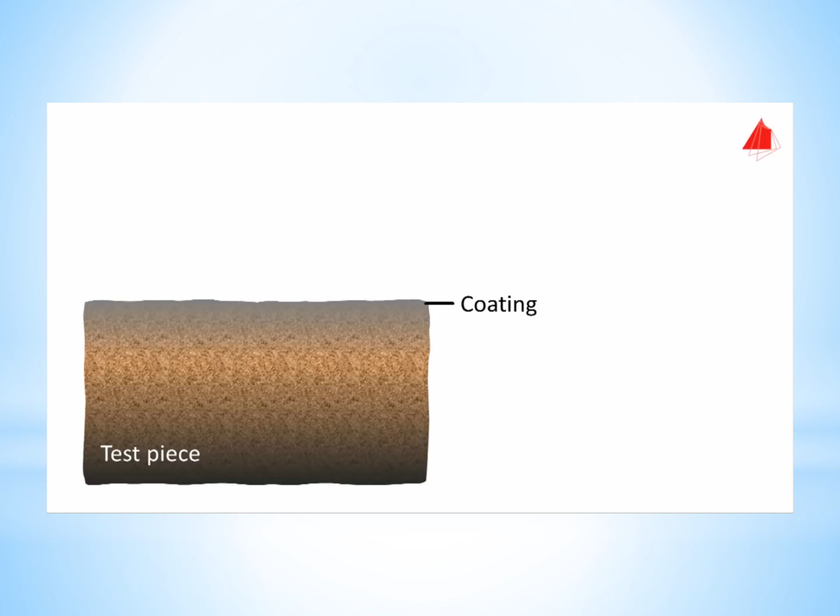Dye penetrant examination is an important method of non-destructive testing of materials. This is the basic principle. Often the surface of a workpiece is covered with rust or paint, which masks material defects, as shown in the sectional view. Therefore, the first step is always the pre-cleaning of the test piece surface.

This must be done very thoroughly so that any defects present, here it is a crack, are open to the surface. In the second step, the penetrant is applied to the test piece, usually a red-colored low-viscosity oil. Due to the penetrant's high surface wetting capability, it penetrates into the defects and cracks.

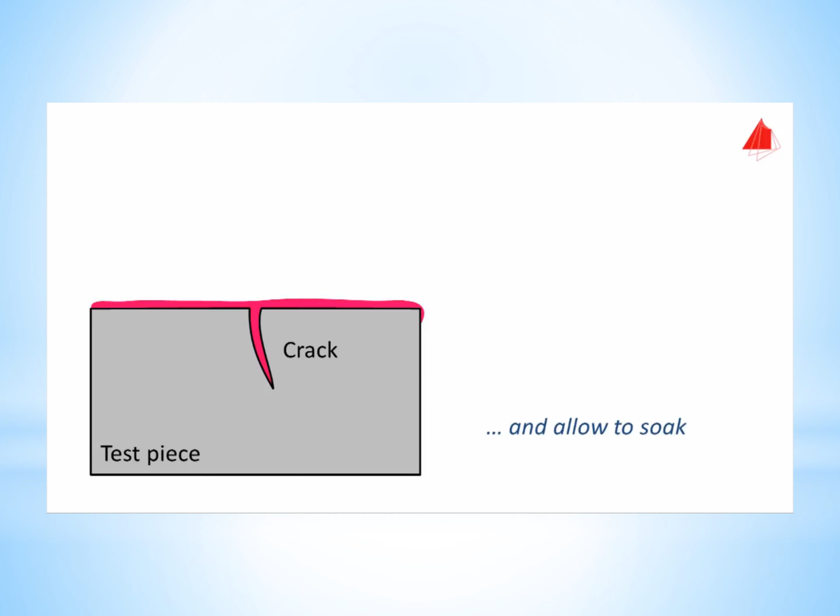After several minutes of dwell time, the third step is to rinse the part's surface cautiously with water. The water removes the penetrant completely from the surface, but leaves it in the crack.

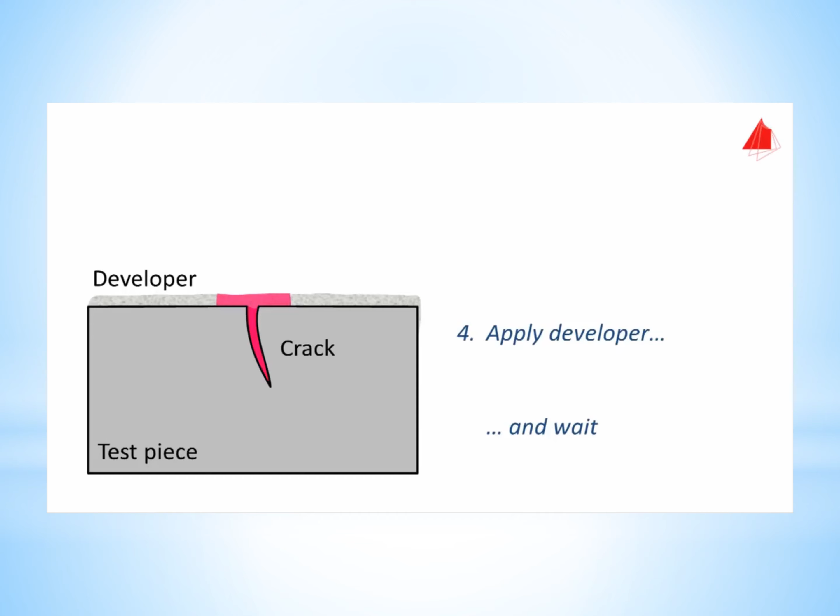Now, the fourth step. After drying the test piece, a developer is applied onto the surface. The developer is a fine-grained white powder suspended in a liquid. It forms an even coating on the surface. After drying, it draws penetrant from the crack out onto the surface. The location of the crack is indicated clearly on the surface.

And this is how it is carried out in practice. We wish to inspect two samples: a segment of a worm gear shaft and a broken bicycle crank arm. Both test pieces have already been cleaned. First in line is the worm gear shaft.

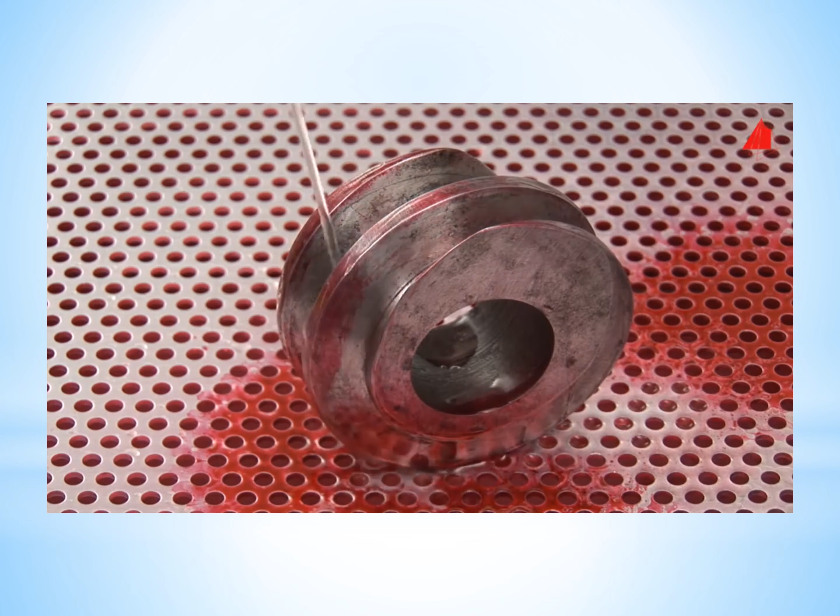The material tester applies the penetrant. After a dwell time of about 10 minutes, she removes the excess penetrant from the surface by rinsing the test piece gently with water. She takes care not to rinse for an unnecessarily long time because the penetrant is supposed to stay in the defects.

Now she dries the surface of the sample with a cloth to absorb the excess water. As the final step, she applies the developer and lets it dry. That's it. Several cracks are indicated on the surface in deep red color.

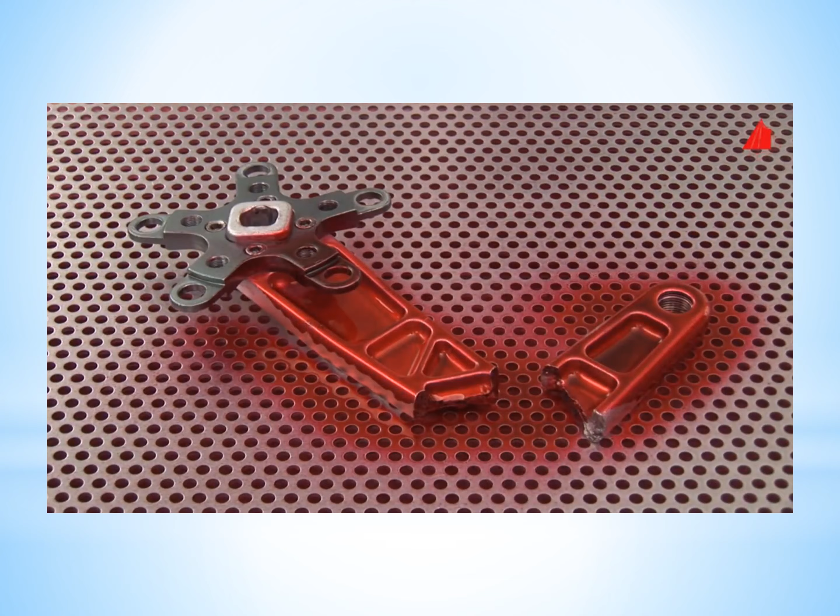Next, the broken bicycle crank arm has to undergo the dye penetration test: spraying with penetrant, allowing to soak, rinsing, drying, and applying developer. Clearly, additional cracks are indicated on the fragments.

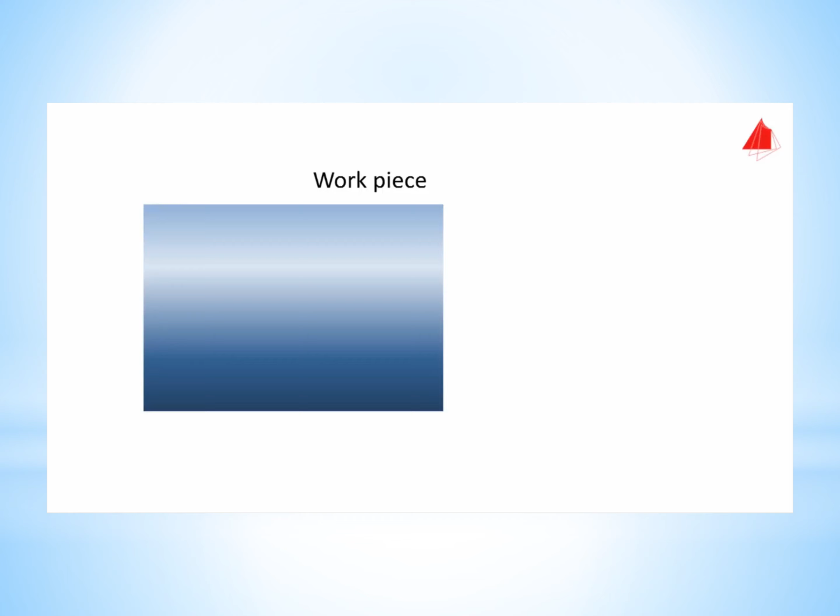Non-destructive testing: ultrasonic examination. The basic principle of ultrasonic testing of materials is the propagation and reflection of sound waves. As an example, a cylindrical workpiece is shown in the animation. The longitudinal section through the cylinder shows the position of the atoms, extremely magnified and simplified as a single crystal.

To begin with, a rigid, unyielding stop is attached to the right front end of the cylinder. At the left front end, a disc is installed. It will be used to transmit and receive sound waves. Pushing and pulling briefly at the disc causes a longitudinal sound wave to propagate through the cylinder.

When the sound wave reaches the rigid stop at the right side, it is reflected and runs back towards the disc, which now serves as a receiver. A free end is also able to reflect a wave.

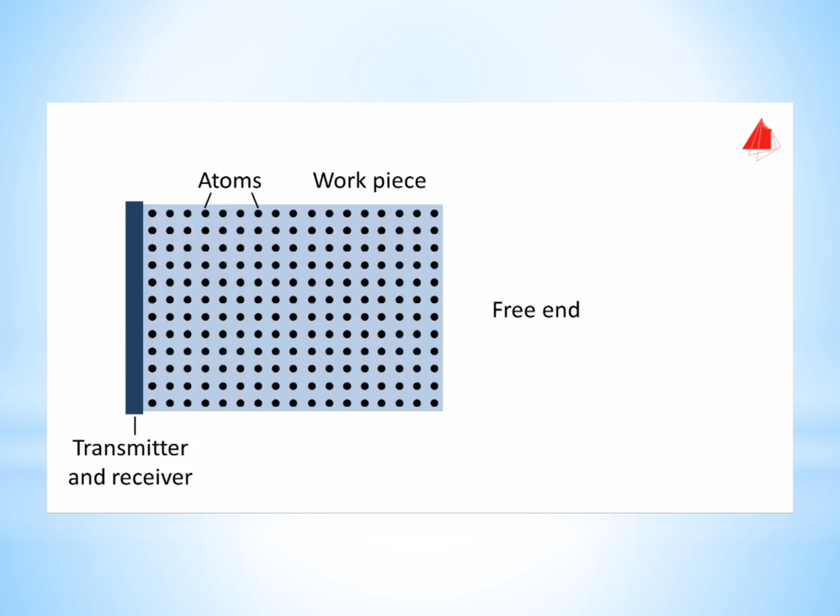In this case, however, the tensile side runs ahead in the reflected wave and finally deflects the receiver to the right. The reflected wave is even reflected again and actually travels several times across the length of the cylinder, but this is not shown in the animation for the sake of simplicity. So, if a sound wave is generated at one end of a workpiece, it will travel through the material at its speed of sound.

At the free end of the workpiece, the sound wave is reflected and returns to the transmitter, which then acts as a receiver. For ultrasonic testing of a workpiece, a rather compact transmitter is used in most cases, generating a short ultrasonic pulse. At a place free from defects, the pulse travels to the right front end, also termed back wall, where it is reflected and recorded again as an echo.

When the transmitter is moved a little downwards, the cavity reflects a part of the wave. That part arrives earlier at the transmitter than the rest of the sound wave. Even further downwards, the cavity reflects the complete ultrasonic pulse.

For material testing, either the echo of a defect can be utilized, this is the pulse echo mode, or the phenomenon that hardly any sound waves pass through the imperfection, this is called the through transmission mode.

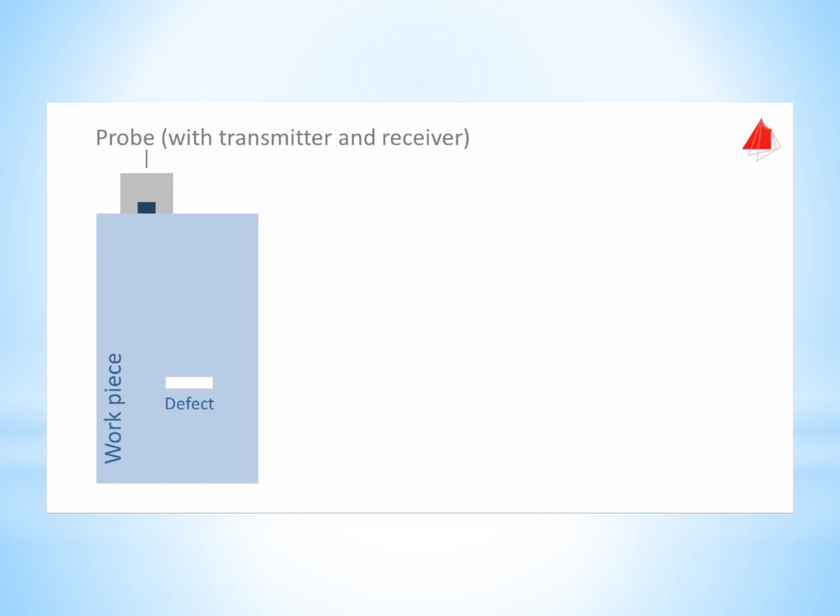In pulse echo mode, a transducer installed in a probe performs both the sending and the receiving of the ultrasonic pulse. On a computer monitor, intensity is plotted upwards on the y-axis and time towards the right on the x-axis. With the probe at a place free from defects, only two signals may be seen on the monitor: the transmission pulse and the echo from the lower surface of the workpiece, termed back wall echo.

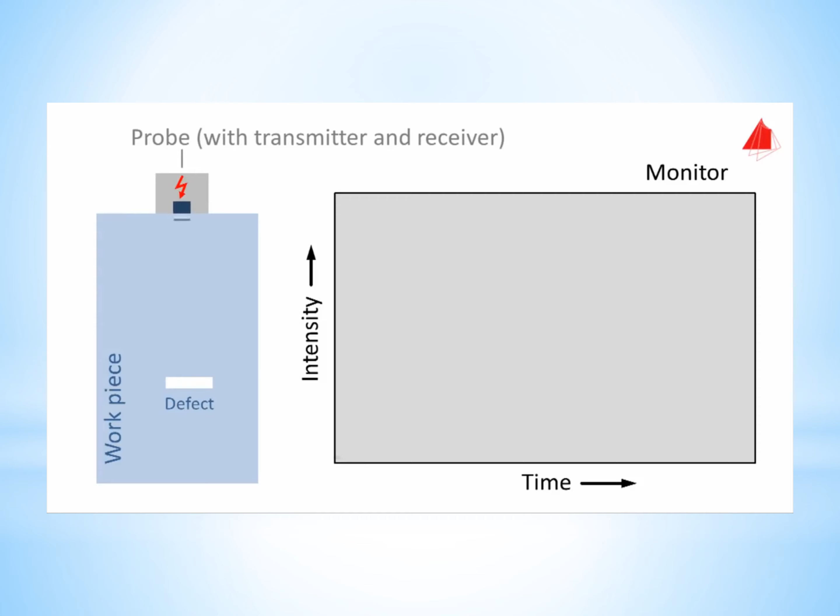Moving the probe towards the right leads to an additional echo created by the defect. Even further towards the right, only the defect echo is visible apart from the transmission pulse.

In our laboratory, there's a green painted steel cylinder to be found. It contains artificial defects which are invisible from the outside. To track down the defects, the material tester uses the pulse echo method.

After placing the probe on top of the cylinder, initially no echo at all may be seen on the monitor. The reason is the too small contact area between the probe and the workpiece. Only with the use of a gel, the so-called couplant, can the ultrasonic pulses get into the workpiece and back into the probe.

Now the back wall echo turns up on the monitor. The material tester spreads the gel evenly on the top surface, so she is able to examine the entire cylinder.

Using the velocity of sound in the material, one can plot the calculated depth on the monitor to the right instead of time. A very useful feature.

With the help of so-called trigger gates, which may be set on the echoes with a computer mouse, the depth of the defects can easily be read off at the lower left-hand corner of the monitor. The cylinder back wall lies at a depth of about 200 mm below the probe, so the cylinder has a height of 200 mm. And here we go.

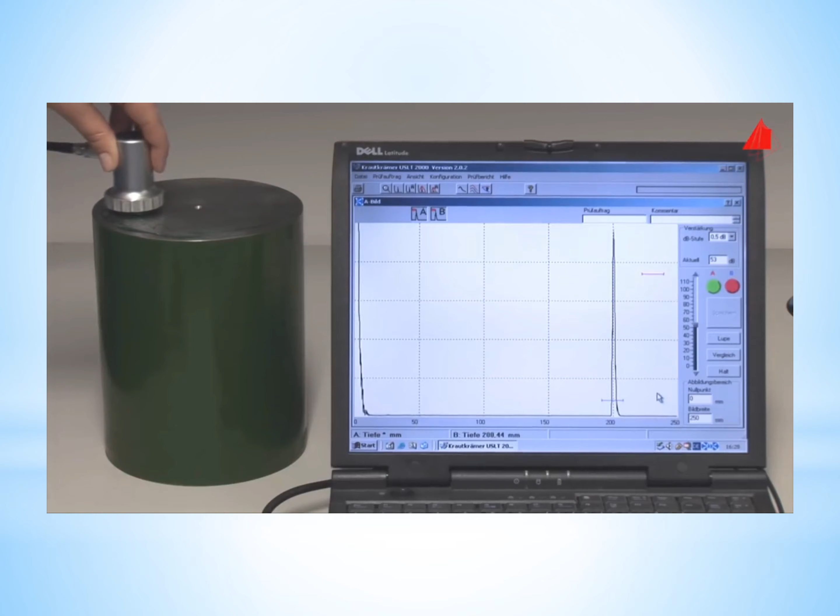The material tester scans the upper front end of the cylinder with the probe and observes the monitor. A defect echo appears on the monitor. This defect is located at a depth of 130 mm below the surface.

Another echo indicates a defect at a depth of 87 mm. The second smaller echo at 174 mm is caused by double reflection on the same imperfection.

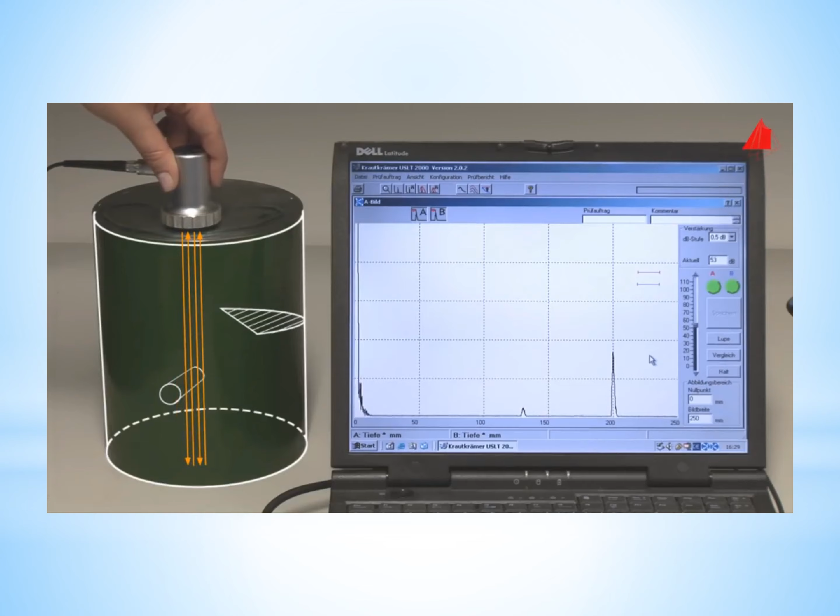And these are the defects: a drill hole and a saw cut. Filled up near the surface and painted, they are not visible from the outside. The drill hole is at a depth of 130 mm, and the saw cut 87 mm below the surface.

Trams are popular means of transport in Karlsruhe in southern Germany. The tram cars are not only cleaned regularly, but also tested thoroughly at regular intervals by the transport company. Among many other maintenance points, the ultrasonic examination of the wheel axles plays an important role.

A tram enters the maintenance hall for inspection. Some of the tram cars have already been lifted up, so the bogies can easily be detached, pushed forward and examined carefully. This is one of the bogies, jacked up to comfortable working height and prepared for ultrasonic inspection.

Special attention is given to the wheel axle, among experts known as the wheel set axle. It has been designed as a hollow axle, which saves weight and facilitates ultrasonic examination. The material tester applies a suitable oil as a couplant into the bore of the axle.

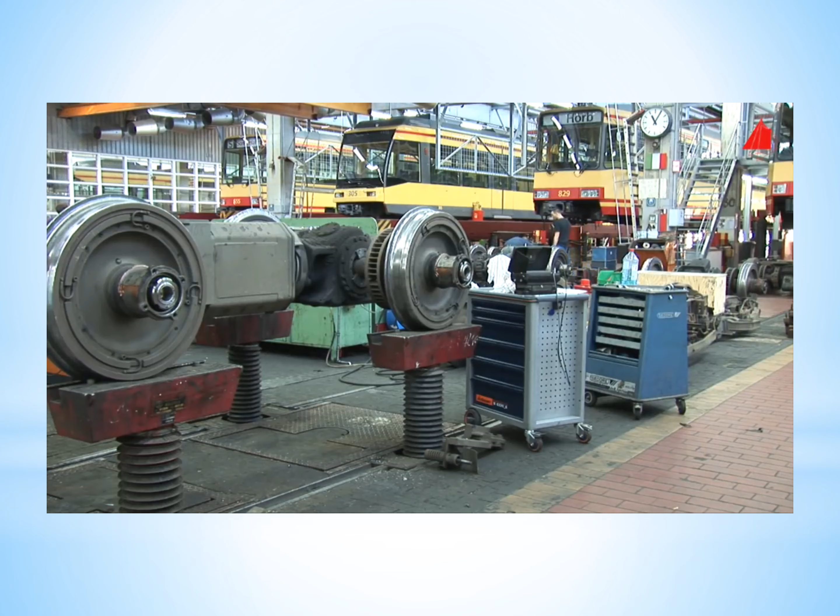Now he takes a special probe designed exactly for this purpose, inserts it carefully into the bore with a mount, and evenly spreads out the couplant by turning and pushing.

He has accurately marked the most important examination points at the mount. In an experienced manner, he positions the probe at the appropriate places within the wheel set axle and watches the monitor closely. The probe has specially been designed for this application; it transmits ultrasonic pulses at an angle of 45 degrees.

At a place without defects, no defect echo returns. But when the pulse encounters a crack which has grown in from the outside, double reflection occurs and a typical defect echo is recorded. It is important to note that also the shape of the wheel set axle may lead to an echo, for example at shoulders.

These are so-called contour echoes. In this particular case, only contour echoes are recorded. No abnormality has been detected. The wheel set axle is perfect and can be used again to transport many passengers until the next examination becomes due.

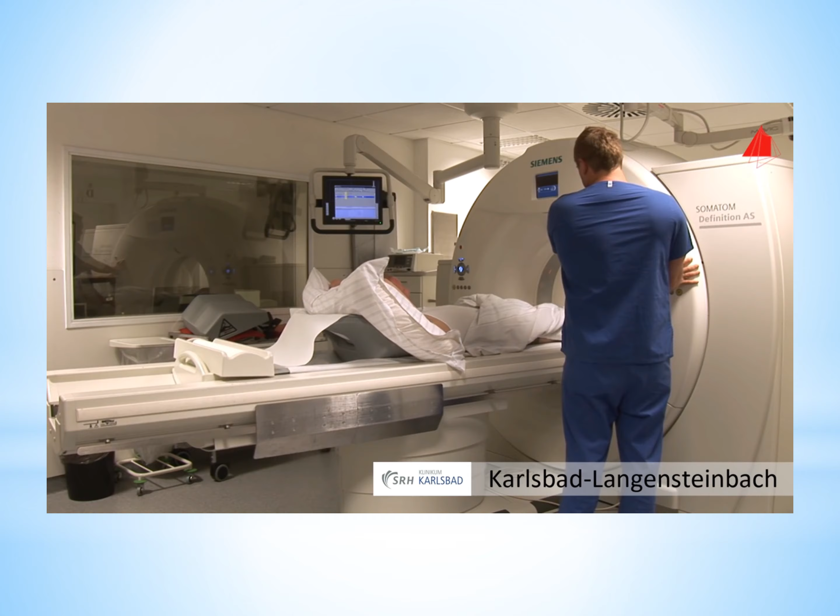X-ray inspection and computed tomography are widely used in many areas of everyday life. Their application is best known in medical imaging. Using X-rays, medical doctors can visualize the interior of the human body. Even complex structures can be made visible.

X-rays are frequently used in non-destructive testing of materials as well. The inner contours of complicated workpieces can be made visible, and of course defects, such as cracks and pores.

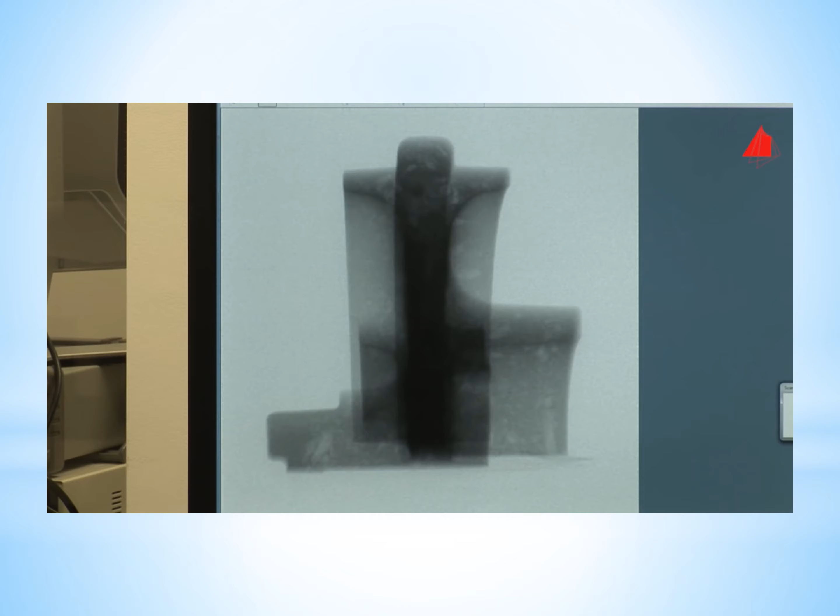But how are X-rays actually produced? They are generated in a so-called X-ray tube. To build an X-ray tube, first of all a thin-walled glass tube with a high vacuum within is needed. In the lower part of the tube, a V-shaped wire made of tungsten is positioned. This is the so-called thermionic cathode.

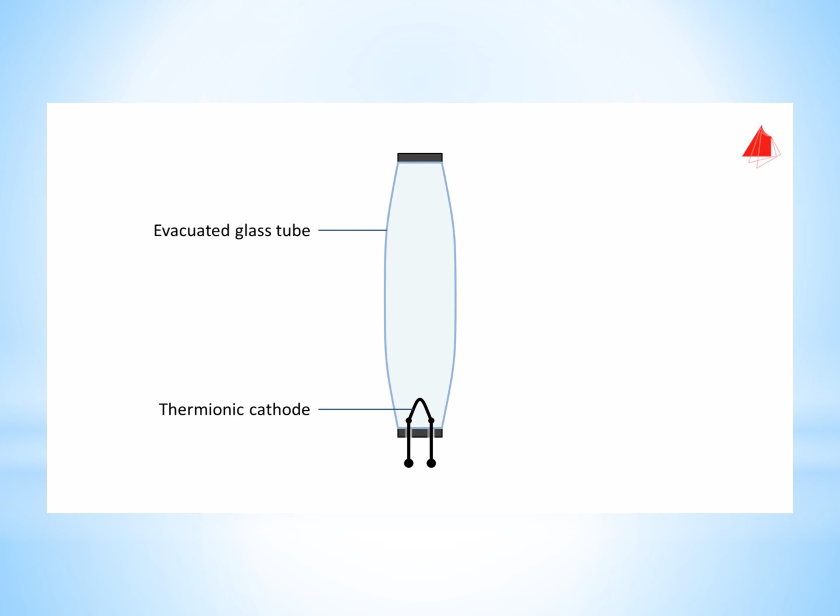A cylinder with an inclined end face is located in the upper part of the tube. This cylinder is the anode. It is made of a refractory metal that conducts heat well. From a high voltage source, the positive pole is connected to the anode, and the negative pole to the thermionic cathode. The thermionic cathode is now heated up by an electric current. The thermal movement enables some electrons inside the wire to leave the surface. This is known as thermionic emission.

By switching on the high voltage, a strong electric field between the thermionic cathode and the anode is created. This strong electric field accelerates the emitted electrons towards the anode. An electron beam is formed. The electron beam collides with the anode at high velocity. The anode material slows down the electrons within a very short distance. This generates the desired X radiation, but unfortunately also a lot of heat, which has to be dissipated by cooling.

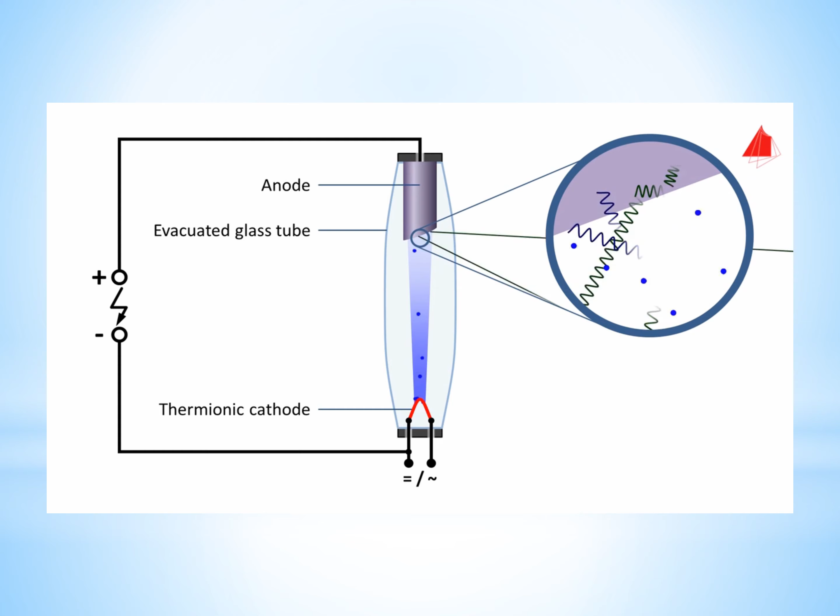Because the anode surface is slightly inclined, the emission of X radiation towards the right is more intense, but a certain proportion also radiates in other directions. A protective housing shields X-rays going in unwanted directions. The desired X radiation can only reach the outside through a small transparent window.

With this setup, a high-resolution X-ray examination is not yet possible. The problem here is the large area on the anode where X-rays are generated.

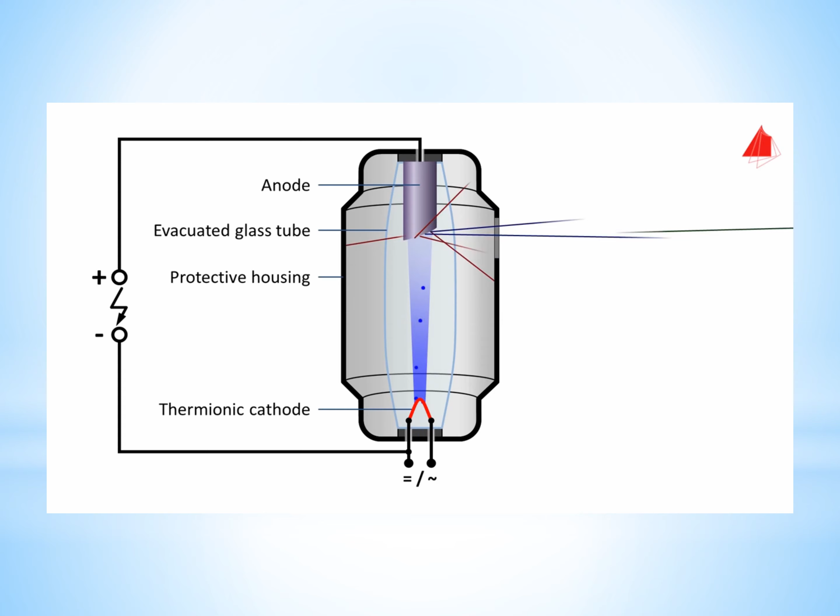To solve the problem, an electromagnetic lens is used to focus the electron beam at a small spot on the anode surface. The smaller the focal spot, the sharper and higher in contrast the X-ray image will be.

Now, how are X-ray images actually produced? For an easier understanding, we will first depict the usable X radiation as a grey cone, and then simplify it as a parallel beam. To take an X-ray image, a suitable image capture unit is needed.

This can either be a conventional X-ray film which turns darker the higher the intensity of the radiation, or it can be a digital detector field that measures the intensity of the radiation and converts it to electrical signals.

When the radiation intensity is plotted as a function of position, a uniform distribution is the result, as shown here. At each point, the image capture unit records the same radiation intensity.

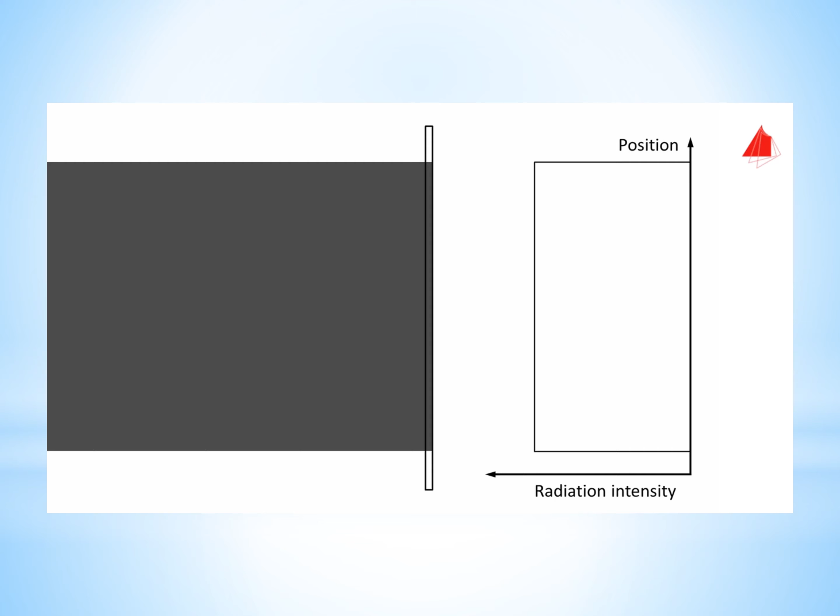But what happens to the diagram when a material sample is placed in the radiation path? The sample absorbs part of the X radiation. The principle is, the thicker the sample in the direction of beam propagation and the higher its density, the less radiation reaches the image capture unit.

Defects such as cracks or pores absorb very little radiation. Therefore, places with defects lead to higher radiation intensity at the image capture unit than flawless places.

Defects extended in the beam propagation direction can be seen particularly well. Those defects which only have a small spatial extension in beam propagation direction can hardly be seen, or cannot be seen at all.

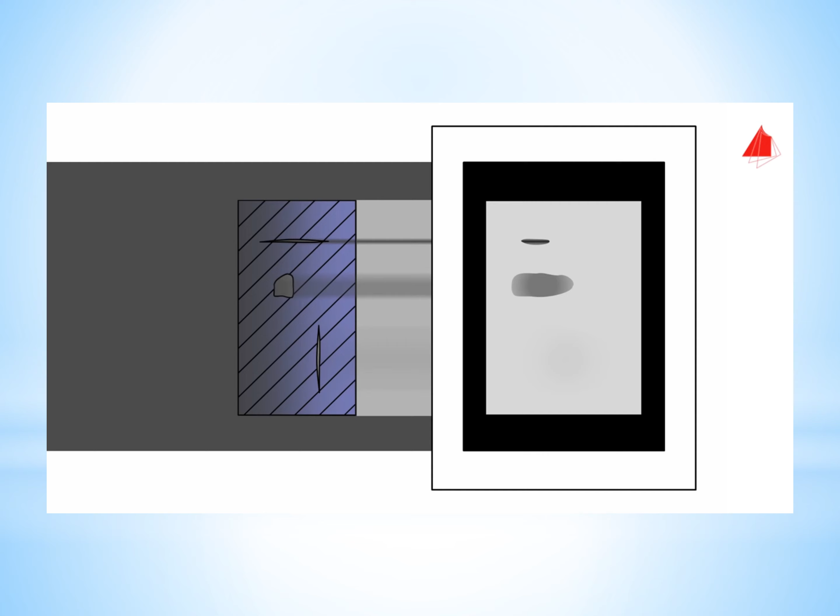And this is what the complete X-ray image of the sample looks like. The originally depicted sectional plane of the sample is shown as a dashed line. Places with defects appear darker because more intense radiation reaches the image capture unit. As expected, the vertical crack is virtually undetectable.

This X-ray image is only obtained with parallel radiation. Using a classical X-ray tube, however, the radiation is cone-shaped. The intensity distribution will therefore look different, and as a consequence, so will the X-ray image. The edges of the sample now appear three-dimensionally and not as clearly outlined as before.

But now there is another problem. The position of the defect in depth, that is, in beam propagation direction, cannot be determined with a single X-ray image alone. It hardly makes a difference in the image whether a defect in the sample is positioned further to the left or to the right.

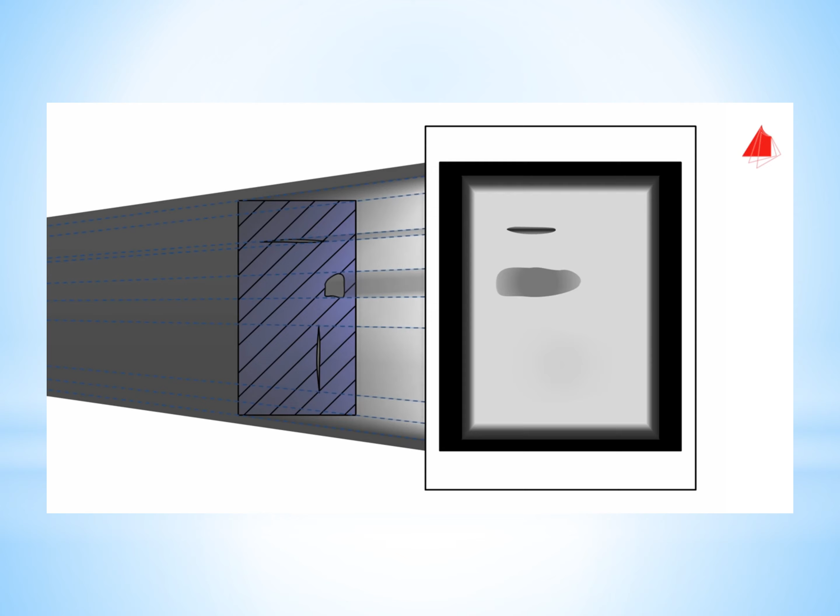In order to determine the depth of location of a defect, at least one additional X-ray image has to be taken from a different direction. Computed tomography pursues exactly this approach, not only by taking one, but in fact many additional images. A fantastic method. How does it work?

The aim of industrial computed tomography is to create a three-dimensional computer model of the sample. To explain the principle, we are going to examine a simple rectangular aluminium specimen. It is placed on a rotating sample stage. Various saw cuts and drill holes have been machined into the specimen.

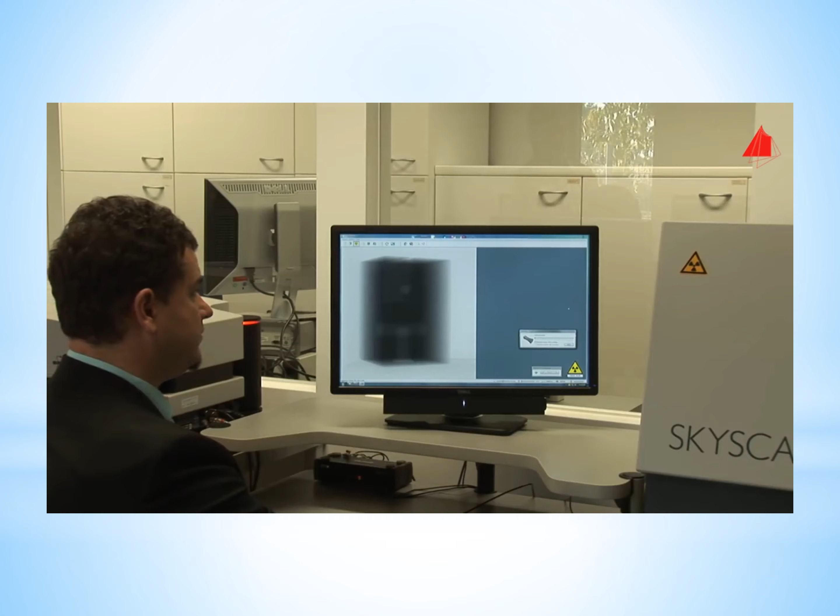The X-ray tube is located on the left side. The detector field is on the right-hand side. In step 1, the computer tomograph records one X-ray image after the other and saves it. After each recording, the sample stage rotates the specimen by a certain angle. In this way, many individual X-ray images from different directions are captured.

In contrast to medical diagnostics, the X-ray tube and the detector field are both at rest, and the sample rotates. The X-ray images are displayed in real time on the computer monitor. As opposed to classical X-ray images, they are shown as positive images.

Thick areas and areas free from defects now appear dark. Thinner regions or regions with defects appear light. The drill holes and the different saw cuts are clearly visible.

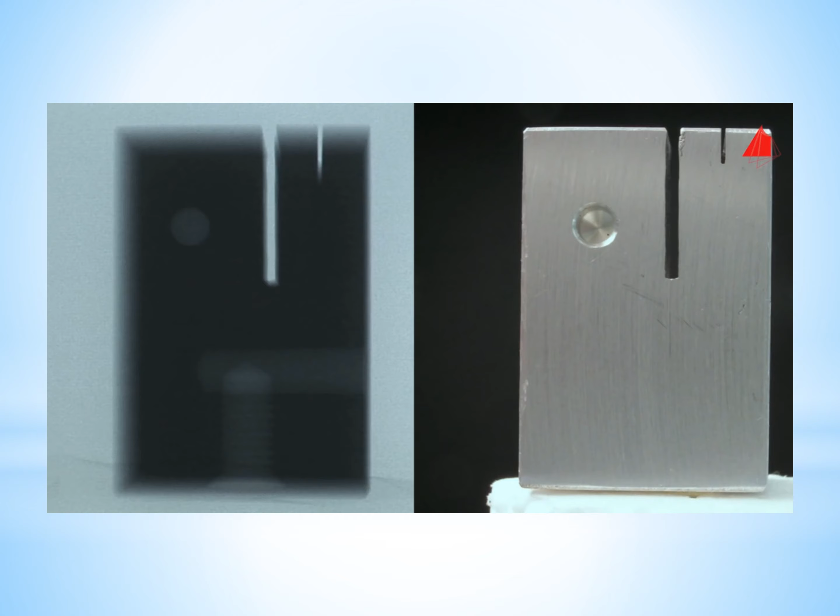After all the X-ray images have been taken, step 2 follows: the generation of the computer model. This step is called image reconstruction. For image reconstruction, several useful methods exist. Here we will explain a commonly used method, the filtered back projection.

A specimen with a cube-shaped cavity is used here as an example. To demonstrate the principle, we will explain the back projection of a sectional plane that goes through the cavity. The sectional plane looks like this.

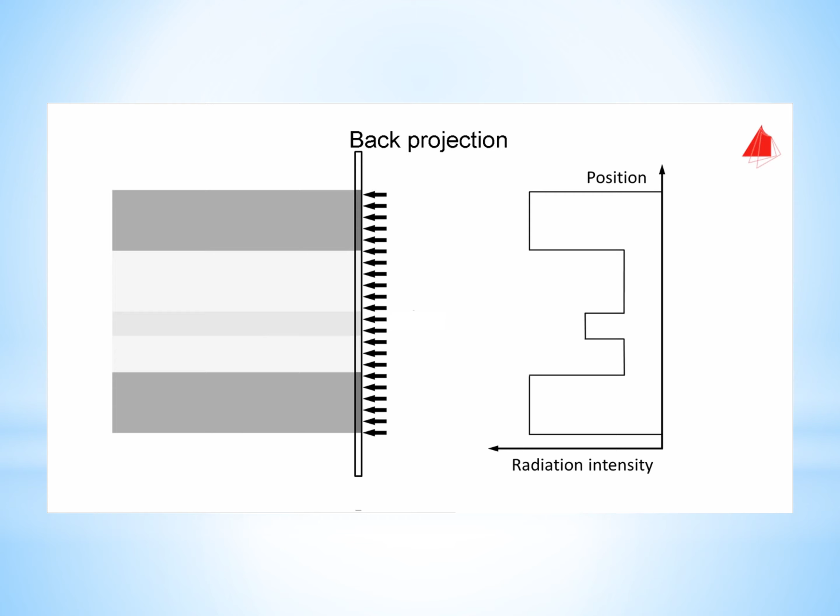After having taken all X-ray images, the distribution of the transmitted X radiation is projected back into the sectional plane. This process is repeated for each X-ray image and the distributions are superimposed. With each superposition, the quality of the model increases.

Displayed as a positive image, the back-projected plane looks like this. Much better results can be achieved with appropriate filter methods and with even more images. The back projection is carried out successively for each sectional plane, until finally a three-dimensional model of the sample is generated by the computer.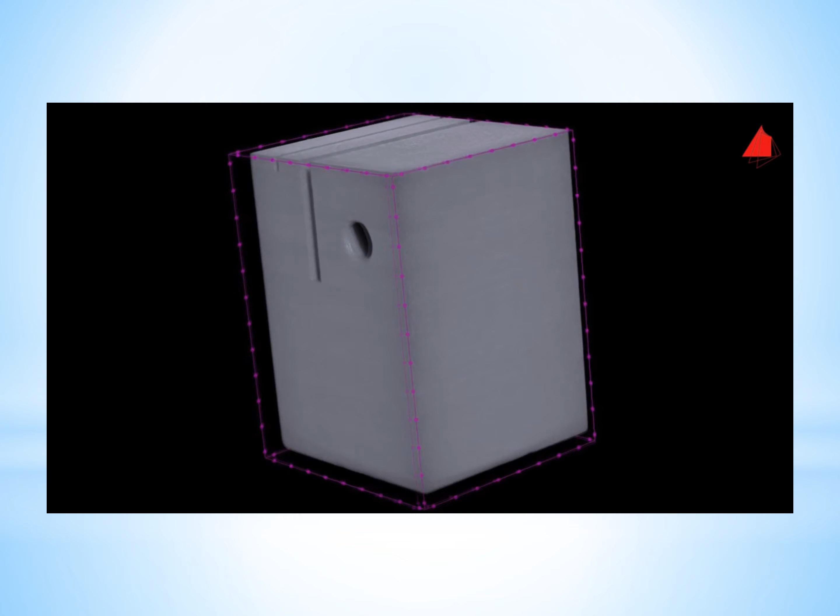Using sophisticated visualization methods, the sample can be examined in detail on the computer display. This is the computer model of our aluminium sample. Not only can it be viewed from the outside, a look at the inside is also possible by means of various sections through the specimen.

The first drill hole, the second drill hole, the saw cuts, and the third drill hole.

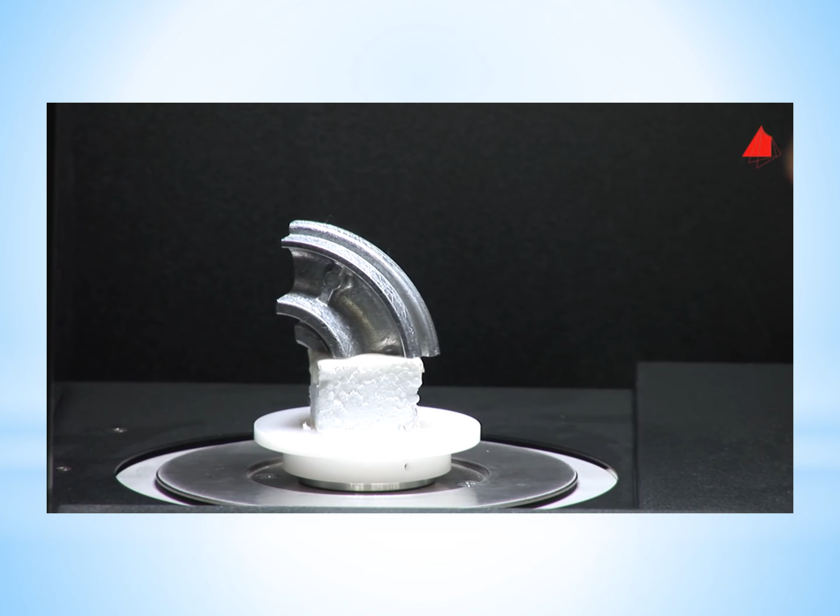And here we go. We want to examine part of a die-cast sample made of an aluminium alloy. Shortly after the start, the first X-ray images can already be seen on the monitor. After recording one X-ray image, the sample is rotated slightly and the next image is taken.

The resulting X-ray image files are also called raw data sets. Later on, the raw data sets enable a reconstruction of the individual cross-sections and, based on them, the calculation of the computer model.

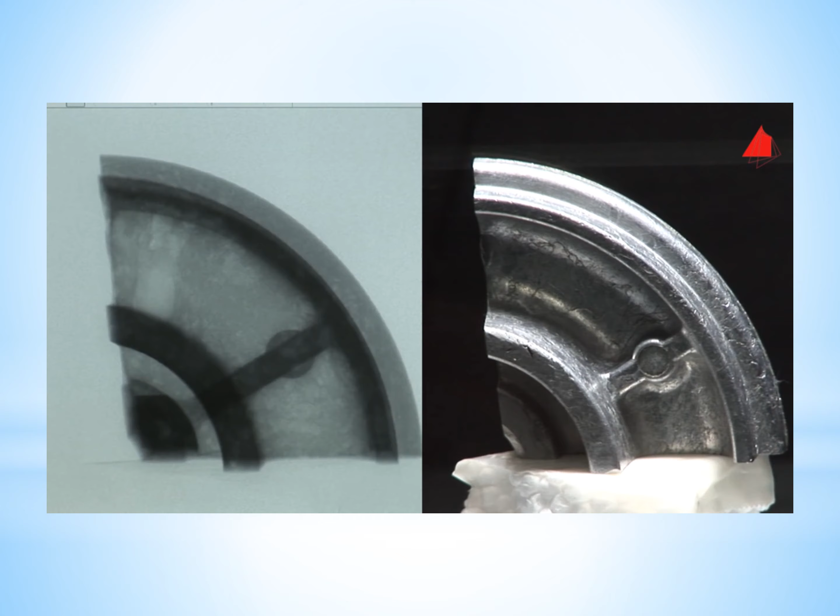Now the computer model is completed. The inside of the sample can now be inspected in detail, and above all, the method is completely non-destructive.

Many pores of different sizes can be seen. The pores are filled with air that has been trapped in the course of the die casting process. The venting of the die has not been good and has led to a great number of large air inclusions.

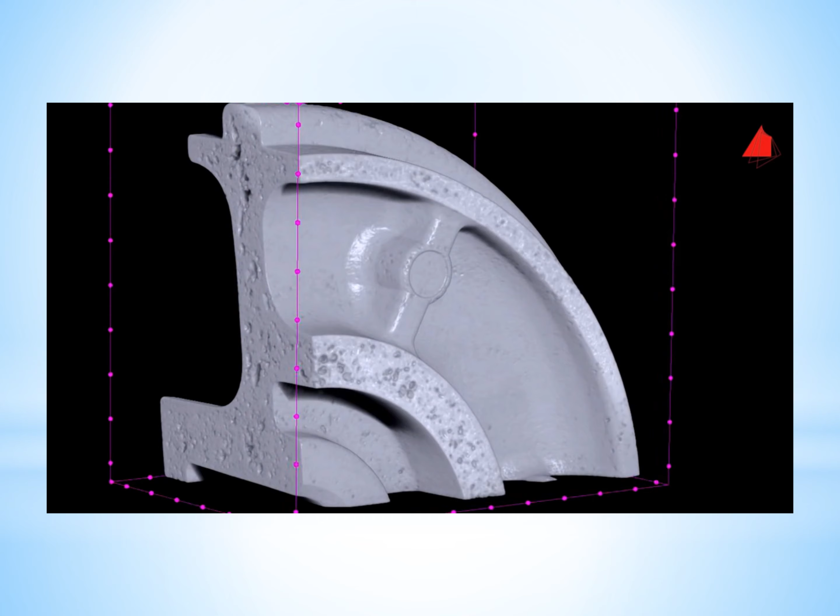If preferred, the material can also be visualized transparently. Then the defect surfaces appear bright.

Computed tomography is a fantastic method, so it is not surprising that it is being used more and more as an excellent non-destructive testing method in materials testing.

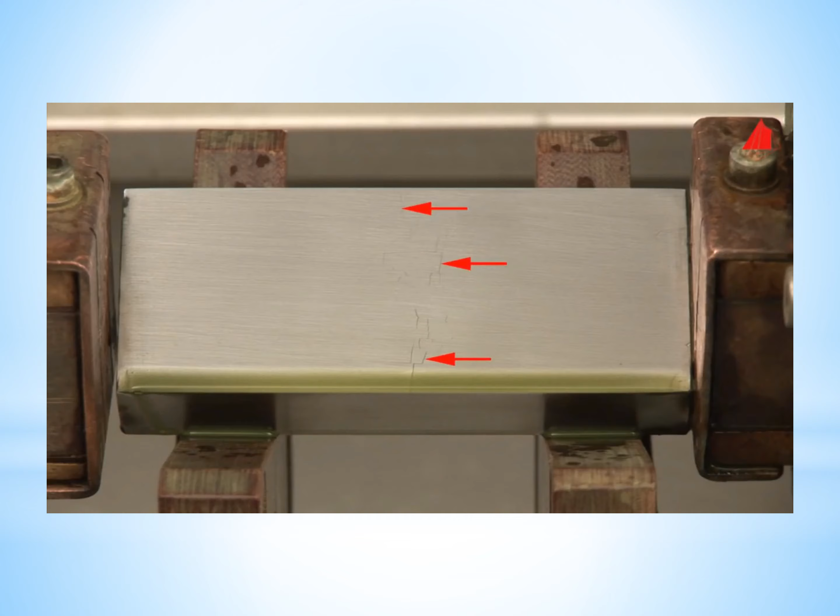Already in daylight, dark lines are visible on the surface. The lines can be seen much better under ultraviolet light and particularly well at darkening the daylight. The suspension contains pigments that cover the magnetic particles and fluoresce under ultraviolet light. The particles run off in areas free from defects and they are attracted and clustered near defects. This workpiece shows a whole array of cracks.

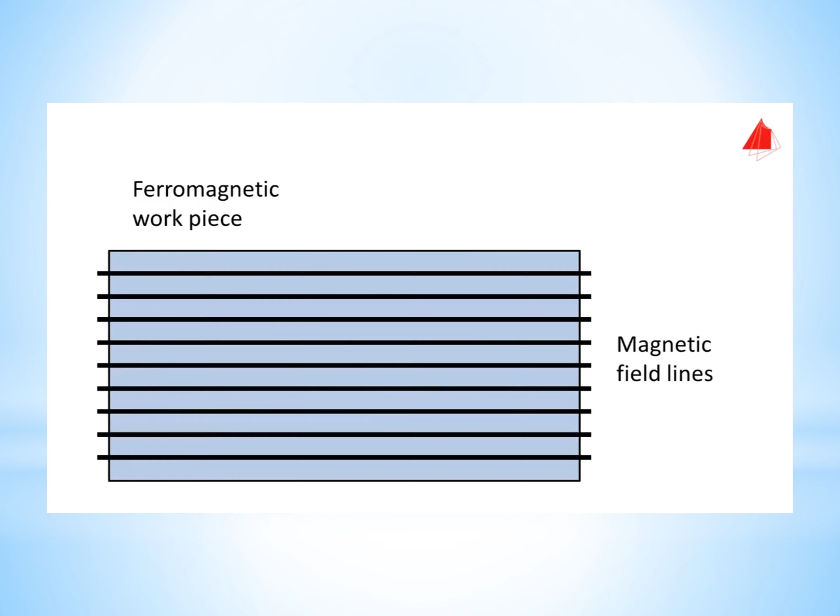The basic principle is to magnetize a ferromagnetic workpiece parallel to its surface, as shown in the sectional view. If the workpiece is free from defects, the magnetic field lines run within the workpiece and parallel to its surface.

In places of magnetic inhomogeneity, for instance near cracks, the magnetic field lines will locally leave the surface and a leakage field occurs. Now, if a suspension of ferromagnetic particles is applied onto the test piece surface, the magnetic particles will run off at defect-free areas. In places of leakage fields, the magnetic particles are attracted and clustered together, thus indicating the place of the defect.

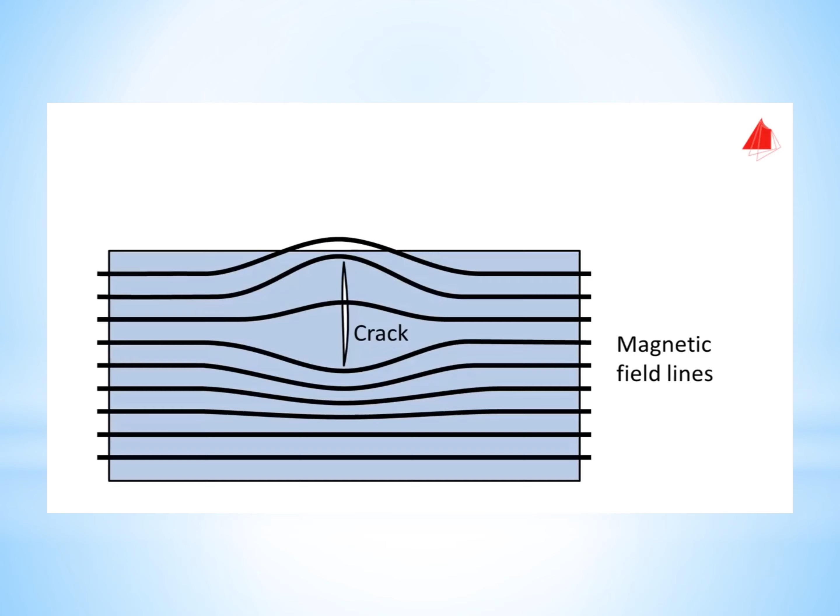The method works best using a pigment which covers the magnetic particles and shows fluorescence under ultraviolet light. Even cracks can be detected that are not open to the surface but just below it, as long as they are not too far below the surface. But one precondition must always be fulfilled: the magnetic field lines must be perpendicular, or at least at a certain angle to the defect. Otherwise there will be no leakage field and the defects remain undetected.

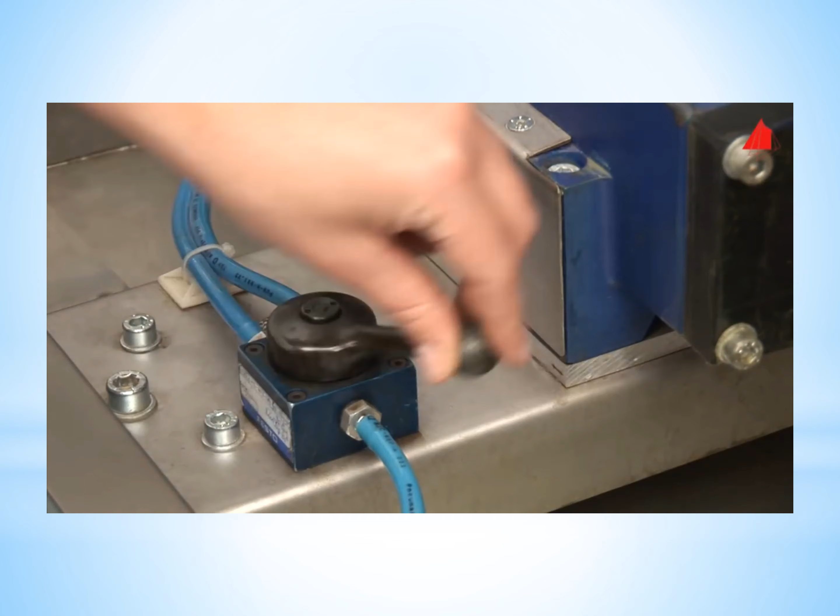Our test sample has been magnetized in horizontal direction. The magnetic field lines run horizontally. This is the reason why cracks in vertical direction are visible particularly well. To make sure to detect all near-surface cracks, one has to magnetize the sample once more, best perpendicularly to the first time. To do this, the material tester switches the machine over to the current flow method. A high electric current flows through the sample, generating a circular magnetic field. Now the cracks in horizontal direction can be seen very well.

The tested sample is a hardened sliding guide. The cracks have been formed during the hardening process and the subsequent grinding operation.

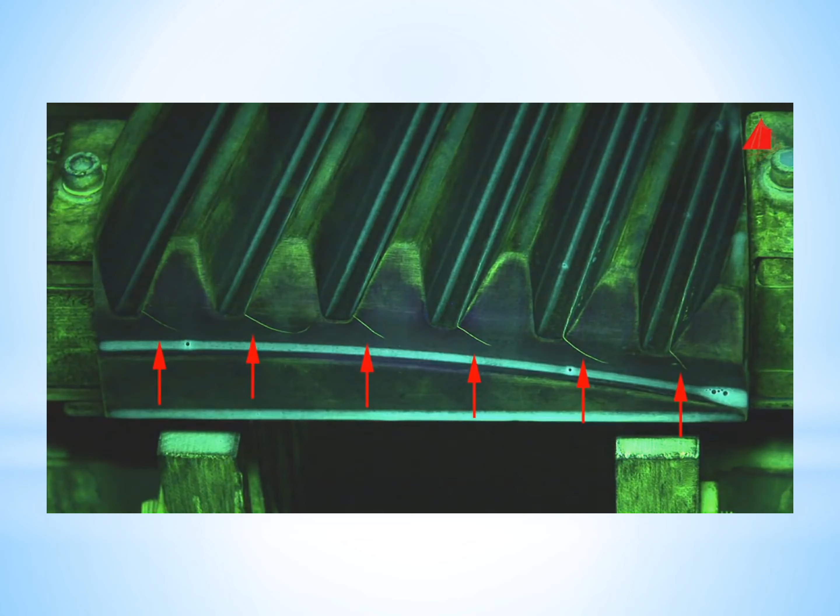Still another test piece has to face the magnetic particle inspection, a section of a large gear wheel. The same procedure again: placing the gear wheel between the magnetic pole pieces, magnetizing and applying magnetic particle suspension. Already in daylight, there are indications of cracks, and again, they are best visible under ultraviolet light while darkening the daylight. The visible cracks are so-called fatigue cracks. They have been generated during the operation of the gear drive, due to a mismatch of the gear wheels.